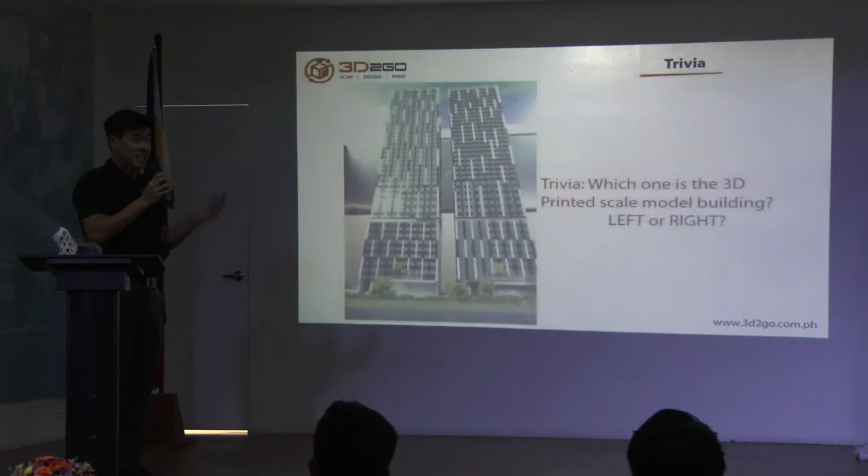Okay, so I'm gonna start off first by asking you guys, giving you guys a trivia, right? So I'd like you to pick which one do you think is 3D printed and which one was the scale model building. Is it the one on the left or the one on the right?

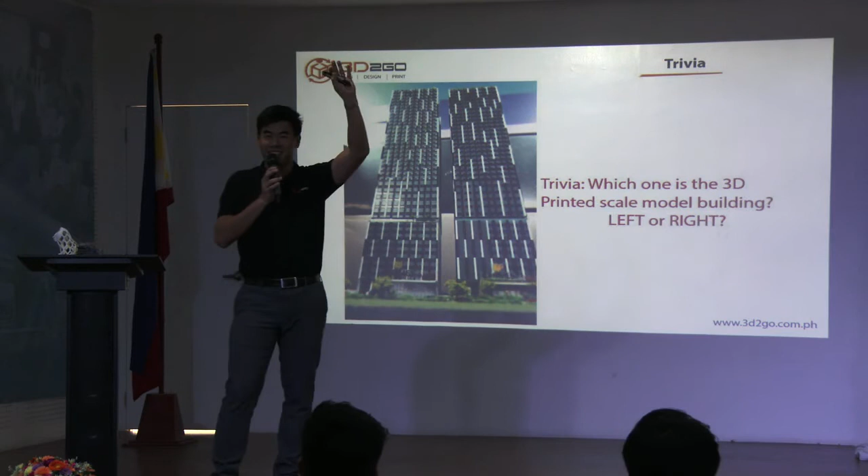Which is 3D printed? Who says the one on the left? How about right? Not many, there's a lot of unsure. So I think there's a lot more people that chose the one on the right.

So the answer is yes, the one on the right. But I guess the traditional way of doing things is usually assembly, right? You get cardboards, toothpick, acetate, and you assemble them together. But bottom line right now, the technology can be used for, and the quality of the output is actually very similar already. So you can replicate things. It's very difficult to distinguish between one from the other, right?

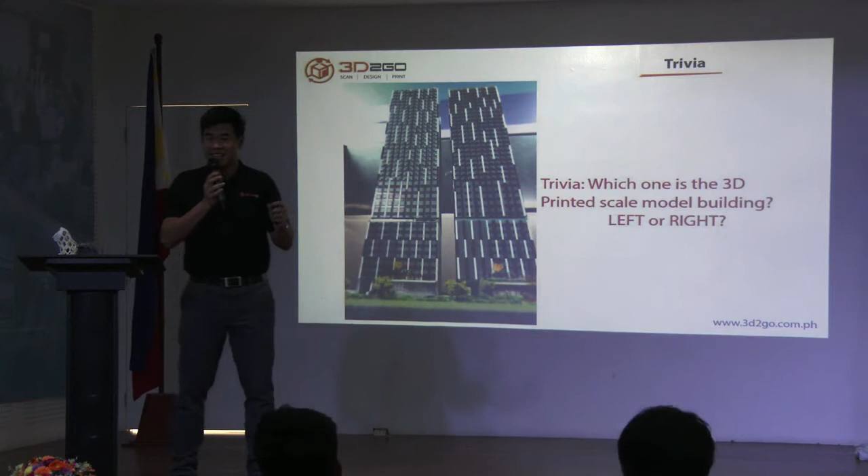The output. Now, I'd like to ask another question. Why do you think that 3D printing is not yet mainstream? Because right now, as you guys know, it's being used by government, the education sector, the tech sector, engineers. In the consumer side, it's also used by probably hobbyists, right? But it's not yet mainstream. Why do you think? It's not mainstream.

And just to give you some perspective, mainstream, when you go mainstream, that's kind of like the holy grail for any industry. Because the critical factor, when you go mainstream, it's used by your father, your mother, your neighbor, and that's where it goes mainstream because the industry will grow exponentially. We haven't achieved that point yet, right? And why is that? So, and that's the major challenge right now.

If you go back probably during the 18th century or the early 19th century, during the time that there was no industrial revolution, mass production, how do you do things? How do you get things? If you wanted a chair or a table, you go to a carpenter. If you wanted, let's say, a knife or a spoon, you go to a blacksmith or a panday, I guess, or something like that, and have it custom made, right?

But because of the advent of mass production, right now, probably, I would think, this is just a guesstimate, but probably 99.9% of everything that you buy right now is a product of mass production. And the purpose of that, the reason for that, is because they wanted to lower the cost significantly. So now, the difference here is that you have to be able to, it's a different world, right?

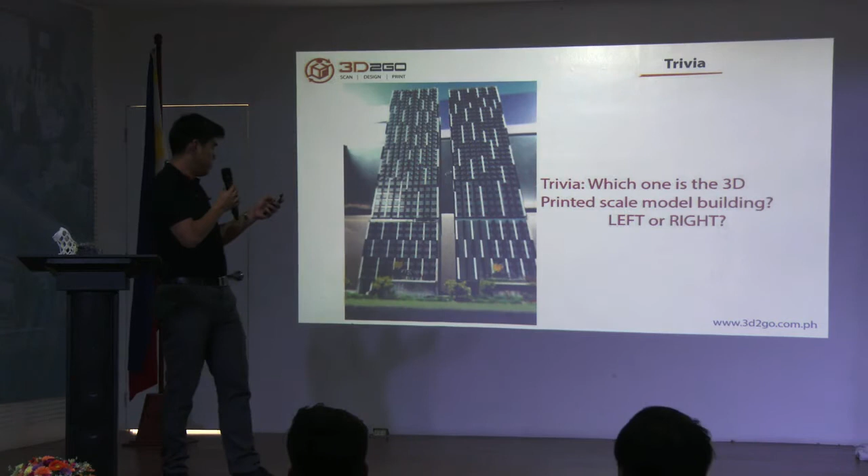So it's a paradigm shift. Like an iceberg, you think it's very small, but in fact it's actually big. So what is the paradigm right now? The paradigm is that you're limited by choices, and that's the issue we have right now in terms of making it mainstream.

Because that's the goal, if we go mainstream, the entire industry, Fab Labs included. I was asking the doctor from NCU a while ago what's the utilization for Fab Labs right now, and I would think that utilization in Fab Labs is very low.

Because I have a friend in Bicol University's Fab Lab, and the utilization is very low. A few people having certain projects done, hobby stuff and all that, but it's really not heavily used. I was asking, is it 80% utilization or 90% utilization? It's not, right? And that's the issue, because it's not yet mainstream. It's only the geeks, the hobbyists, the specialists that use 3D printing.

So now, who among you here was a fan of Game of Thrones? I was a fan up until May, the last season. For those addicted to Game of Thrones, some play cosplay and stuff like that, and you probably want to imagine yourself as the king or queen of the 7 kingdoms.

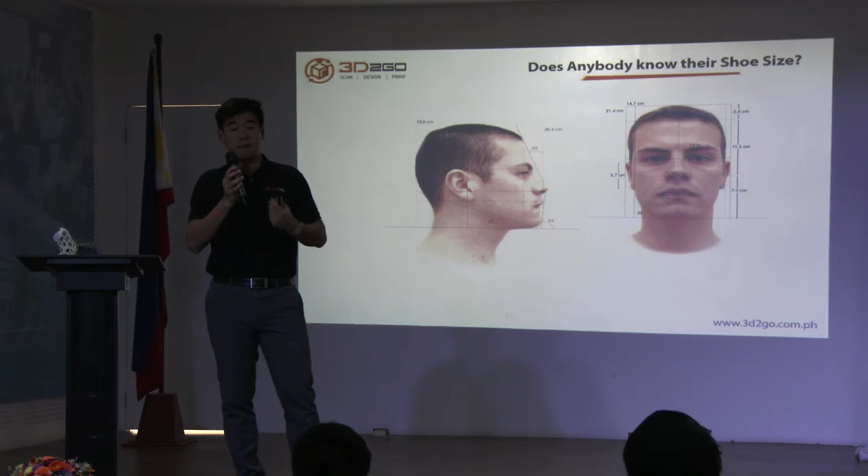Sometimes, unfortunately, some people are quite flat-nosed, and if you're flat-nosed, when you buy glasses, it has to rest on your nose bridge, placed on top of it. This is a very unique example, but it's applicable - you have to have it customized because every individual is different from each other.

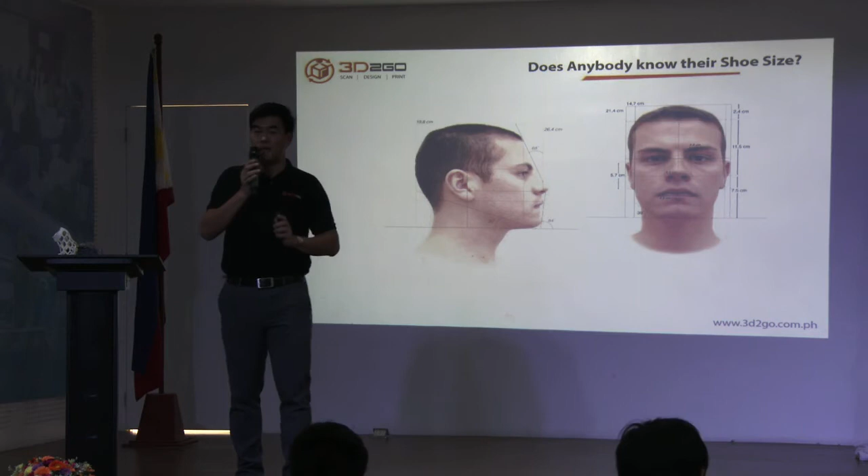More practical applications - let's say you know your shoe size, but do you know the pattern of how you walk? Because every person walks differently. Some people are bowlegged or flat-footed, some walk on their toes. Sometimes after just 1 kilometer you're already exhausted, while in other cases you can walk 10 kilometers and it's nothing to you.

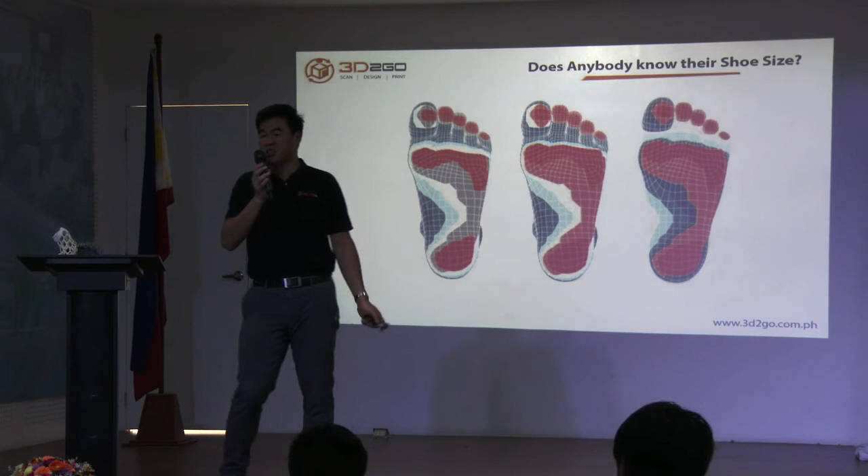So Adidas came up with a heat map of the force exerted on your feet, and partnered with a company called Carbon 3D, which was explained by Dr...

Alvin Cola yesterday as well.

This is a known company, Carbon 3D, a multi-billion-dollar company. One of the challenges of 3D printing right now, and I'll talk about Carbon 3D later, is the time of print. It takes a long time.

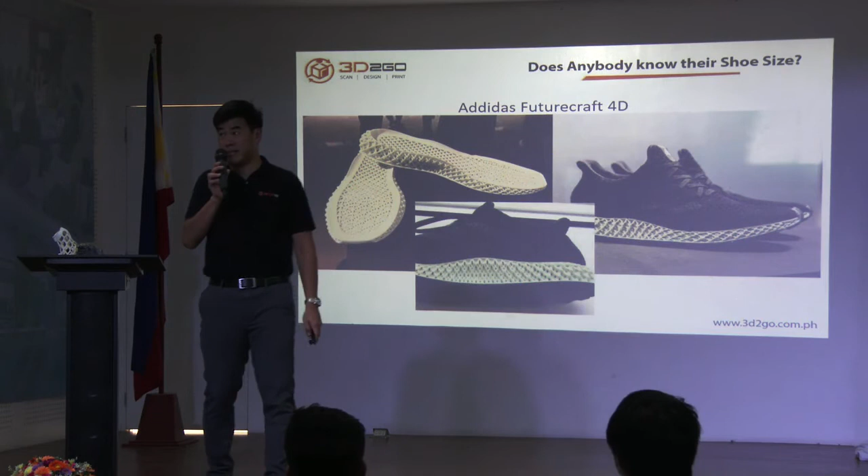Anyway, Adidas, the insole, the outer sole of the shoes, everything is customized because the objective is to balance the load of your body on your feet so you don't get tired quickly. So I'm going to talk about this one briefly.

3D scanning, prototyping, modeling, and printing. I'm not going to talk too much about printing because there are a lot of printing companies here, so they're all going to talk about their printers too. So I'm going to talk about scanning first.

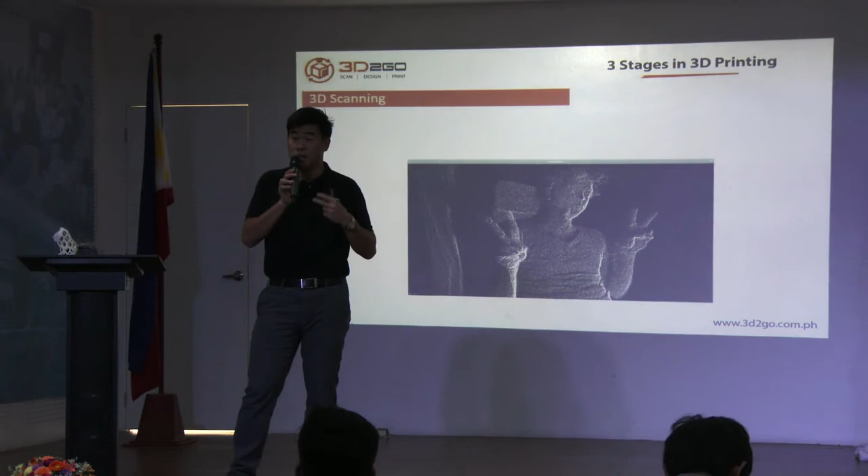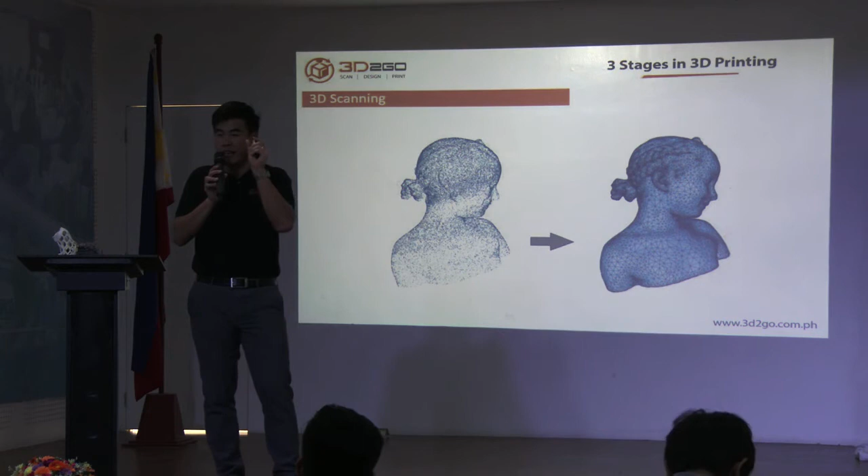What is a scanner anyway? It's the conversion from physical form to digital form through a point cloud. Basically, a point cloud is points in space that resemble an object itself. When you combine those points, you make a mesh. Then when you convert the mesh into solid objects, it becomes really a solid, the second object.

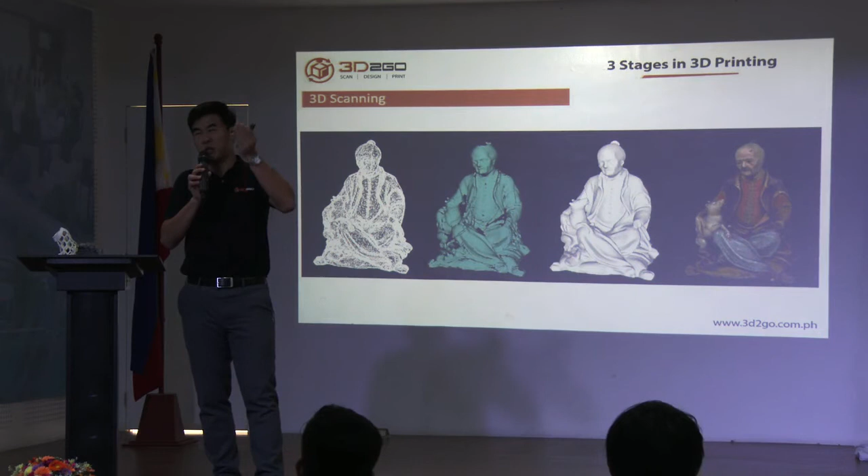So you have the mesh, which is the first image. Then when you convert it to solid images, it becomes the second one. But then you have to reverse engineer, you have to fix it, because when you scan an object, there are blind spots, dead spots, and you have to reverse engineer to fix things. Once you fix things, you arrive at the finished 3D model.

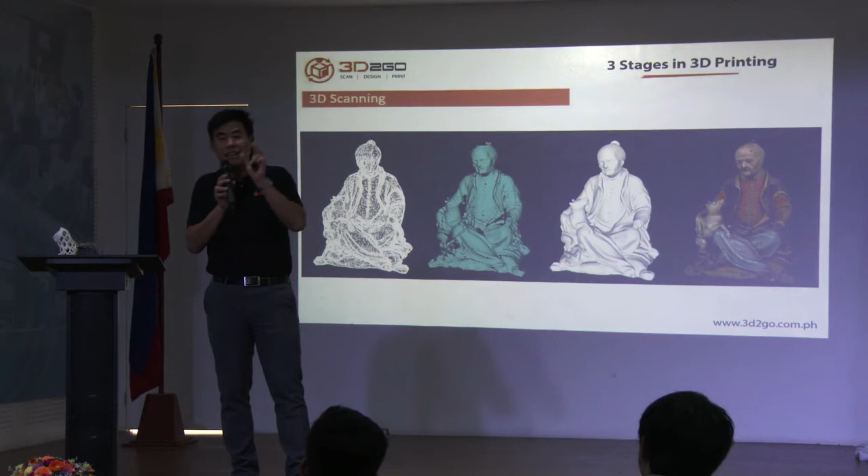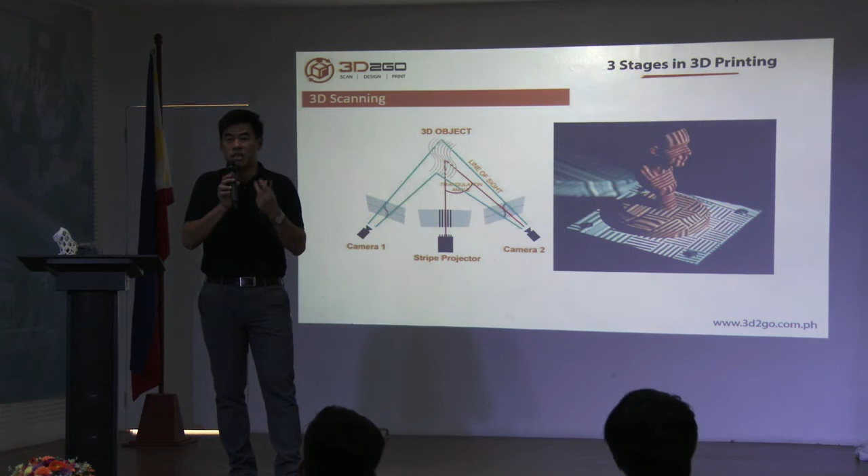And then when you add texture, that's the fourth image. So the way it works is that it projects a pattern onto an object, and any distortion in the pattern is taken as points in the point cloud. That's how it works.

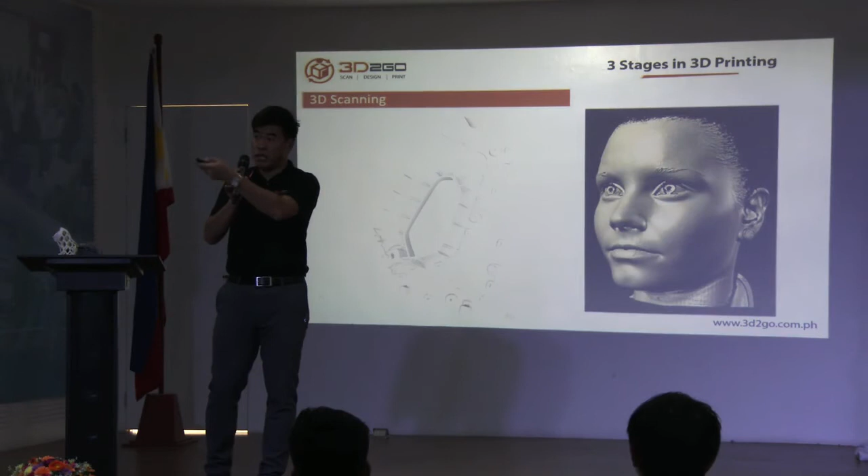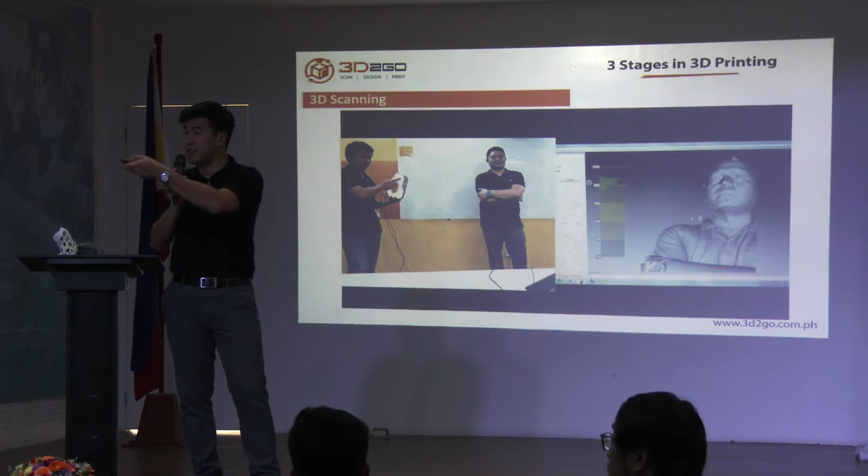So of course you can scan organic and non-organic objects. And this is an example of a video that we've done. I'm just going to play this video shortly.

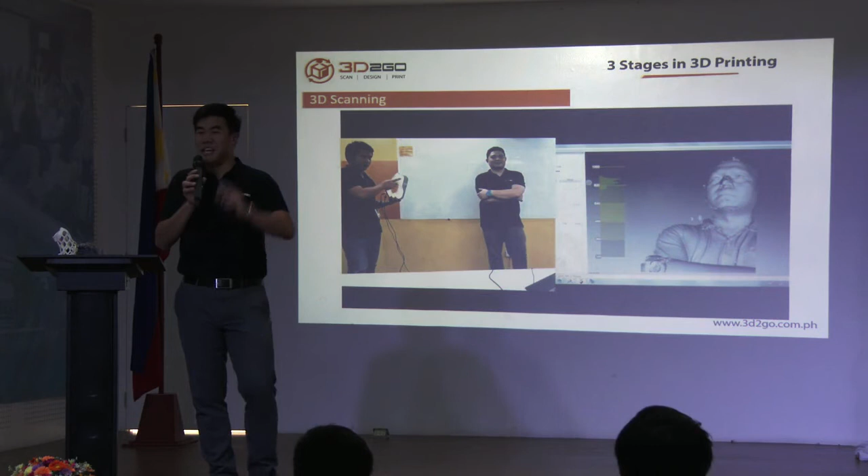Anyway, this is a picture of a person being scanned, so I'm just going to skip through this.

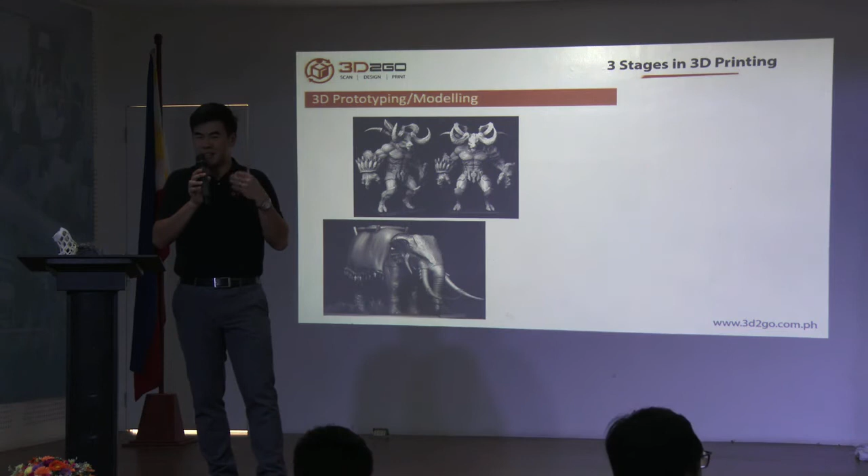So basically, when we do 3D modeling—so I talked about scanning—the next one is modeling and prototyping. Normally when we talk about modeling, we subdivide it, not as a standard, but based on organic and non-organic modeling. Organic is monsters, creatures, animals, plants, and stuff like that. Non-organic is based on geometric shapes, circles, spheres, triangles, and all that.

I have to speed up. Normally you have several different softwares that you use. For organic modeling, it's usually animation software like Maya, Max, ZBrush, and of course in the engineering world, you're familiar with SolidWorks and AutoCAD. I'm not going to focus on this because you guys already know all of these things. Thingiverse, PinShape, and of course simpler software tools as well.

Subtractive manufacturing and additive manufacturing. Of course, you guys are familiar with subtractive and additive—subtractive uses CNC machines, and additive is different.

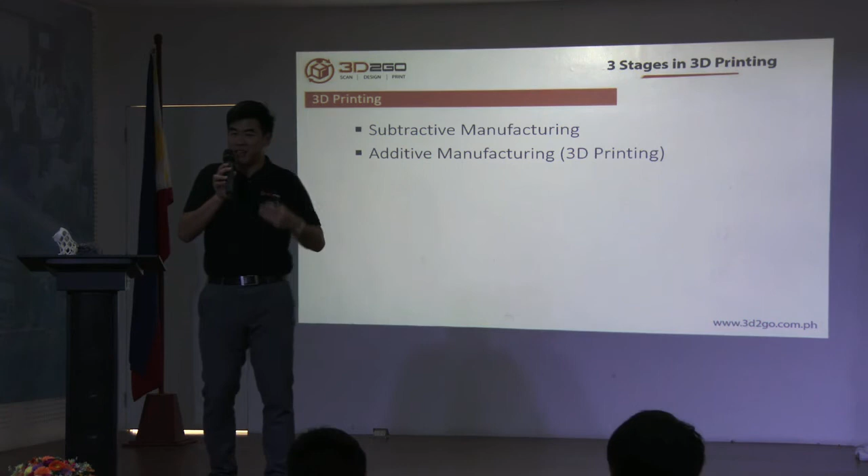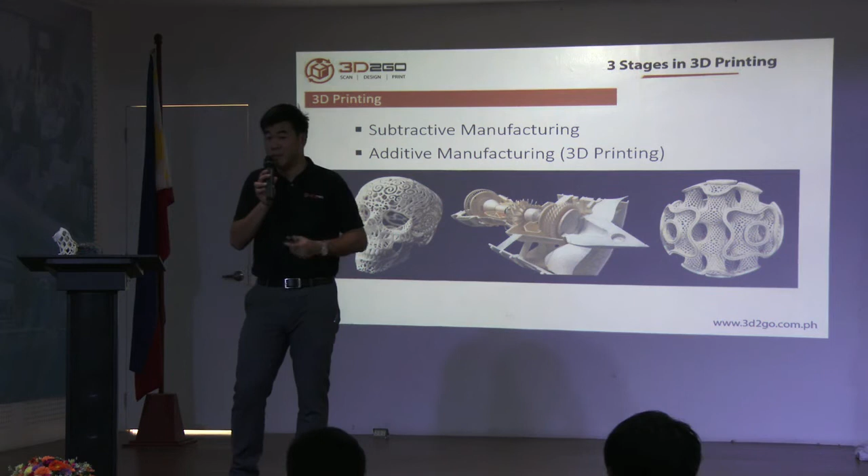Now, one of the things I wanted to focus on is the differences. Why is subtractive manufacturing not ideal? Because it's limited by complexity—you cannot print very complex objects with subtractive manufacturing. Although you know the concepts of subtractive manufacturing, the main advantage of additive manufacturing is the printing complexity. Because if not, you could just go to a machine shop and have something done.

So this is one thing. This is a typical bracket—the one you see on your right is a typical bracket. Using topology optimization, you can actually change the orientation of the object to make it lighter.

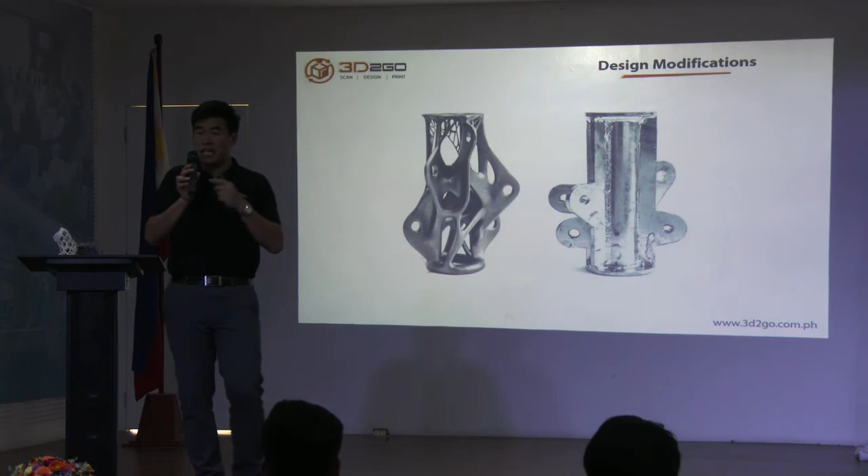Traditionally, if you want to make something lighter, you buy a lighter material like titanium or aluminum, but that costs a lot more. So how do you maintain cost while making something lighter without compromising structural integrity? That's through topology optimization.

Here's one example. You cannot print something like this using subtractive manufacturing processes, it has to be additive. Another example: the one on the left is 73% lighter, same material, same function, but 73% lighter. That's one of the advantages.

I hope I can play this. This is Carbon 3D. I was talking about Carbon 3D, the technology of Carbon 3D is called CLIP, right?

The video is 7 minutes, sped up 7 times, so it's a 1-minute video. You cannot print these objects this fast using other printing technologies.

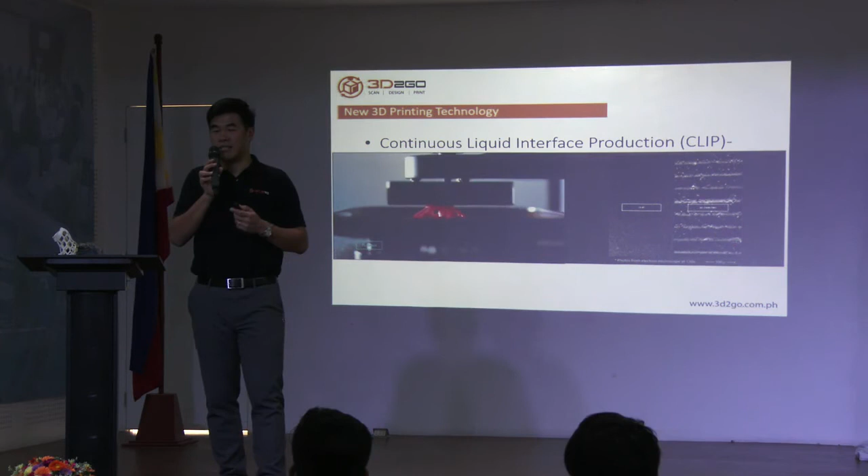The way it works is instead of printing on a layer-by-layer basis, it prints things by growing it. A typical stereolithographic or SLA printer uses light, laser, or DLP to fuse photopolymer resins.

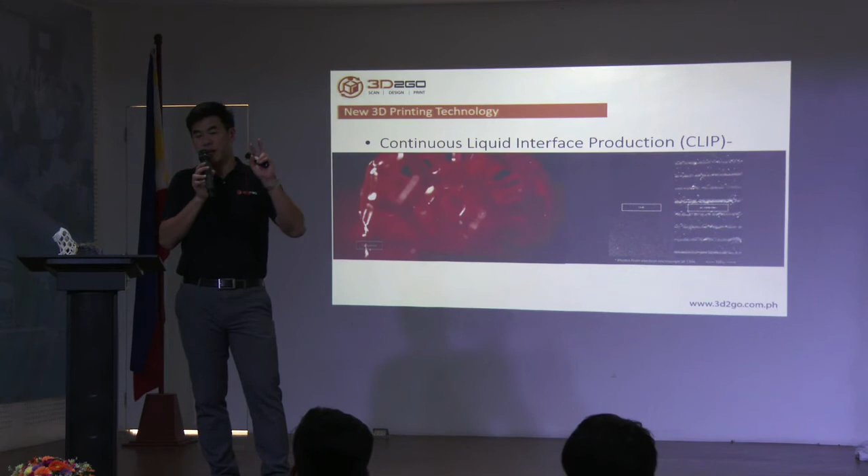In this case, you use two different variables: you use light or lasers to cure, and then you use oxygen to inhibit the curing process. When you use both things simultaneously, you can make it grow, kind of like the process is growing.

It's a lot quicker, imagine about 7 minutes. In a typical printer it would probably take at the very least 50 minutes, an hour, maybe 2 hours. This is a 1.5 by 1.5 by 1.5 inch sphere.

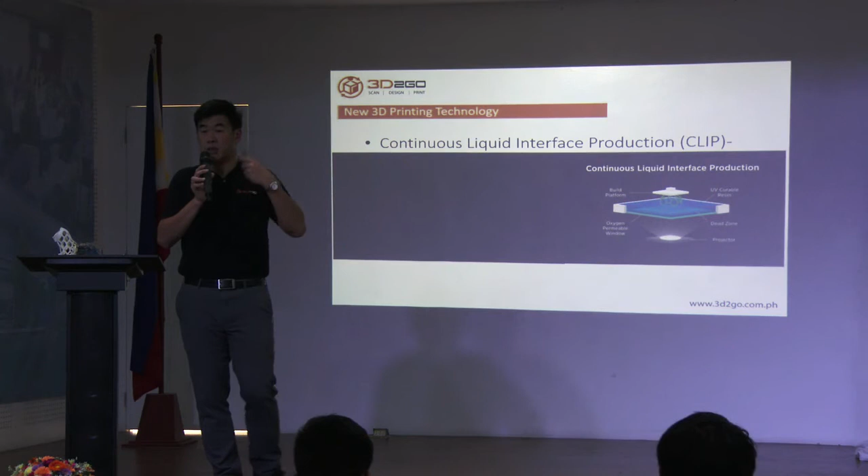The difference is huge compared to 7 minutes, and that would change how manufacturing is done, enabling customized manufacturing processes. It doesn't have to be mass production all the time.

Another advantage of this growing process: when you print normally, you have to understand that printing on the x-axis, z-axis, and y-axis produces different material properties. You have to be familiar with that. But when you grow it, you don't care about orientation, whether it's lying down or something, it's the same thing.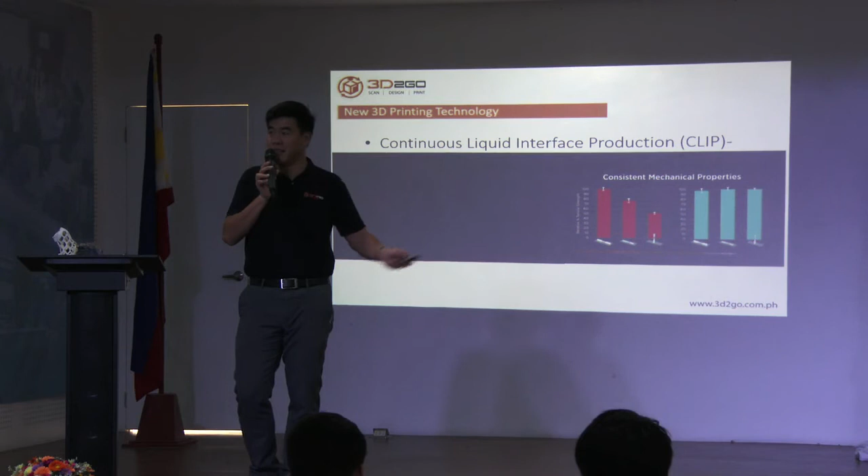Another new technology is volumetric printing. Although carbon is already well established, volumetric printing is not. For DLP printers that use a projector, printing layer by layer always uses still frames.

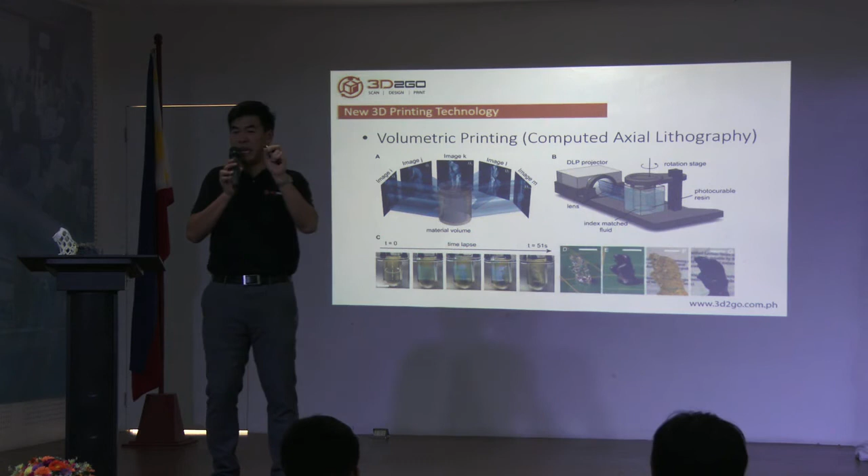This one is video, you're projecting something in video format, and you have a resin tank spinning. So when you're printing, you're growing the entire thing simultaneously. This is going to be a very quick, fast technology as well.

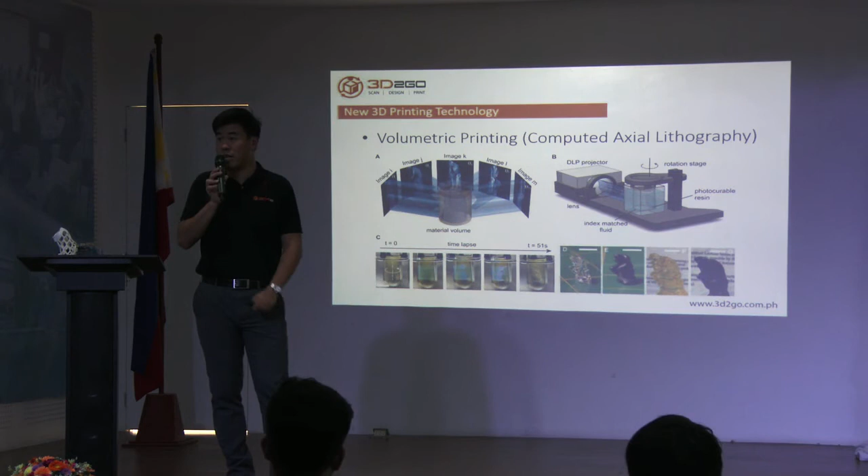What does the future hold? Chocolates, of course, you're kind of familiar with these things. I'm going to speed through this process.

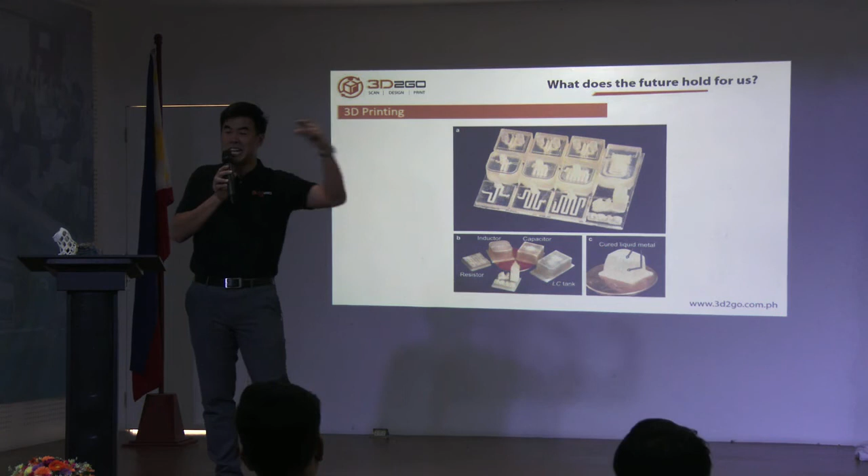Sugar, semiconductors, this was also discussed by Dr. Advincula, which is currently happening right now. In the future, you'll be able to print both conductive and non-conductive materials in one go, and that's a huge advantage. Right now you print a PCB, then you have to put it in a casing. In the future, you print the PCB with the circuitry inclusive of the casing in one go.

It's a huge advantage, both for processing and it's a lot more sturdy since it's one piece. This is organ printing as well. Right now we're still not there, but they were able to print the mesh of an organ, it's still under development. I'm thinking probably another 5 years or so, I don't know, doctor, if it's going to last another 5 or 10 years to be able to print organs.

There's a company called Organovo, which is kind of like one of the forefront companies that does that in the US. Of course, building, you know, this is already...

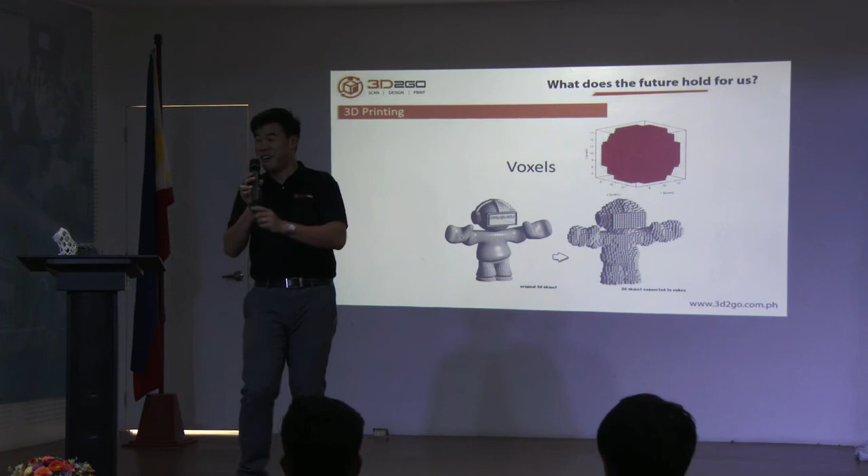I'll just play a video that we've done, which is something we're proud of in the prosthetic industry. Sorry, a few minutes. Can you play?

So we're doing prosthetics right now. This is just marketing stuff.

But if you fast forward further, I'll show some of the projects that we've done.

These are examples of projects that we've done right now. We scan the person's leg or arm, and then we reverse engineer and design a prosthetic arm, leg, finger, or whatever part. Some of them are even functional—we print functional prosthetic limbs for people. So this is a bit of a CSR for us, corporate social responsibility.

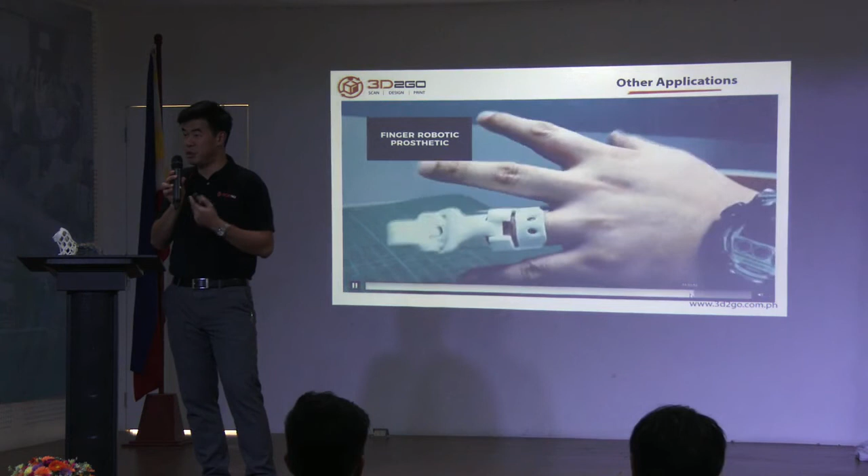Fast forward. Then we do fingers and all that. So next, another function is on the orthopedic side.

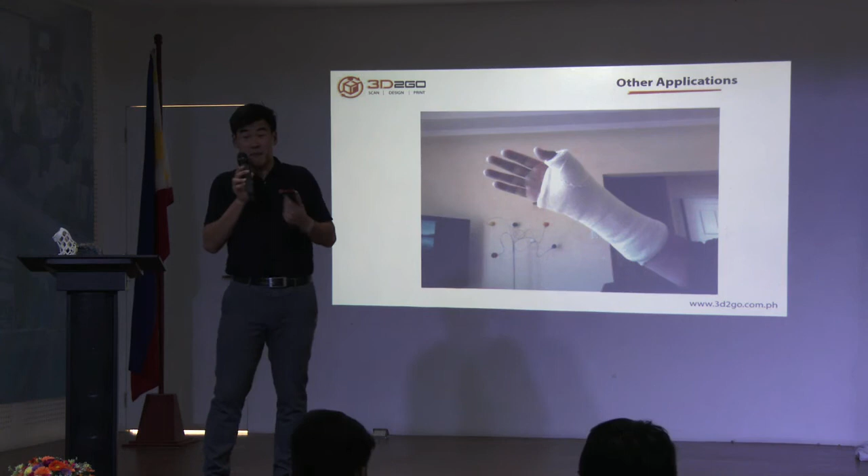Orthopedic is typically cast mold. So if you break a bone, your arm, wrist, or elbow, you have it casted. But what can you do with it? Sometimes you wear it for a couple of months, it's itchy, it's uncomfortable, you can't get it wet, you can't take a bath with it. Maybe you can draw on it—that's the only thing you can do. You have to wear it for a long period of time.

But instead of doing that, you can do a cast mold—an exoskeleton cast mold. I used to have tendonitis from playing too many cell phone games, unfortunately, so I had a problem with my finger and the doctor advised me to keep my wrist still. So I actually printed an exoskeleton for myself. I scanned my wrist, came up with an exoskeleton, made sure the supports were correct, and it's functional. It's a lot cooler, it's reusable—if it happens again in the future I can do it, and I can get it wet, no problem. So there's a lot of functional applications to that.

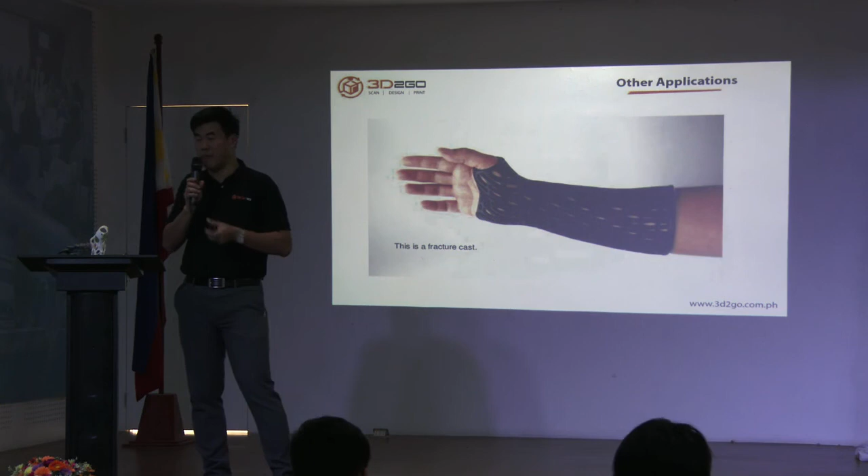So now, functions—prosthetic legs. We've done prosthetic legs, fingers as well.

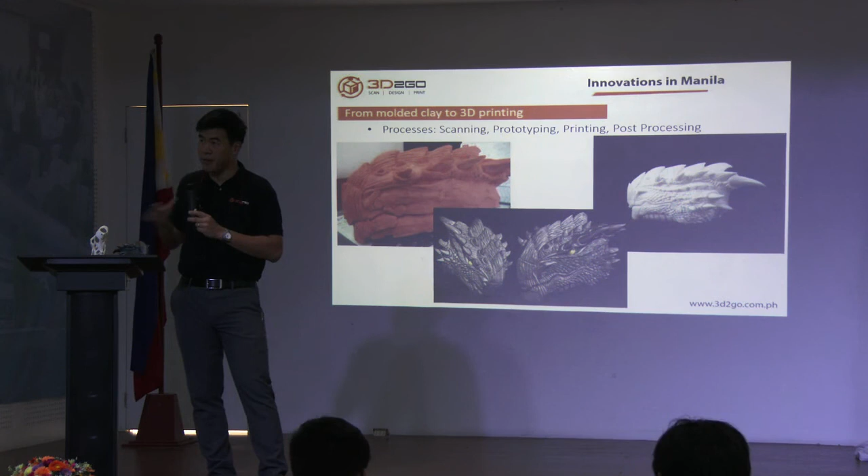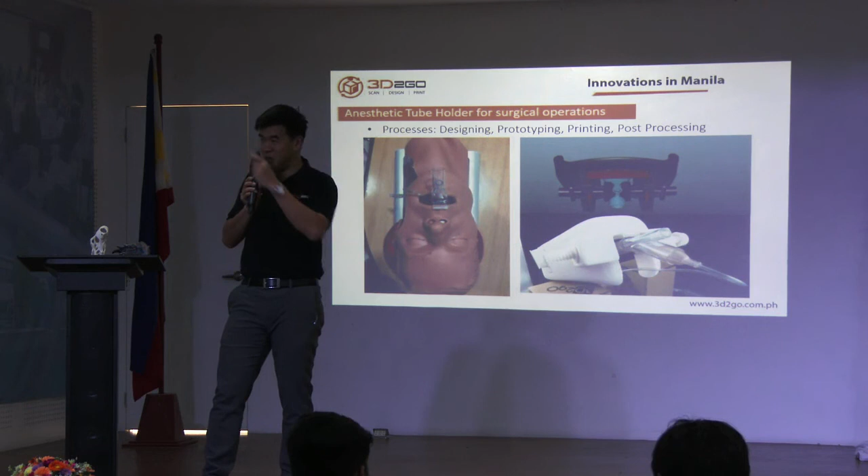We've also done this—an example of a molded clay that was given to us by a customer. They gave us inputs, we finished the model, and came up with the finished product for them. Also, an anesthetic tube holder—the current model for that was disposable, as mentioned to me by the doctor. They wanted something reusable, so we came up with that holder.

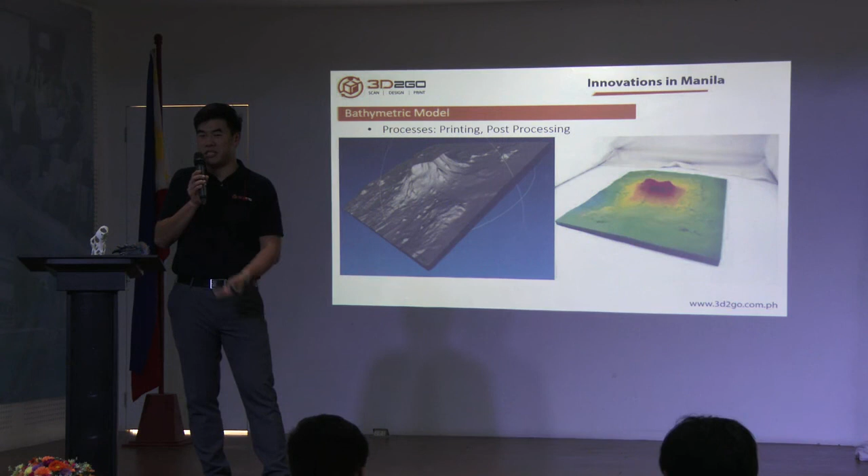And this one's a bathymetric model—it's the opposite of a topographical model, but under the seafloor. So we came up with some topographical maps for this.

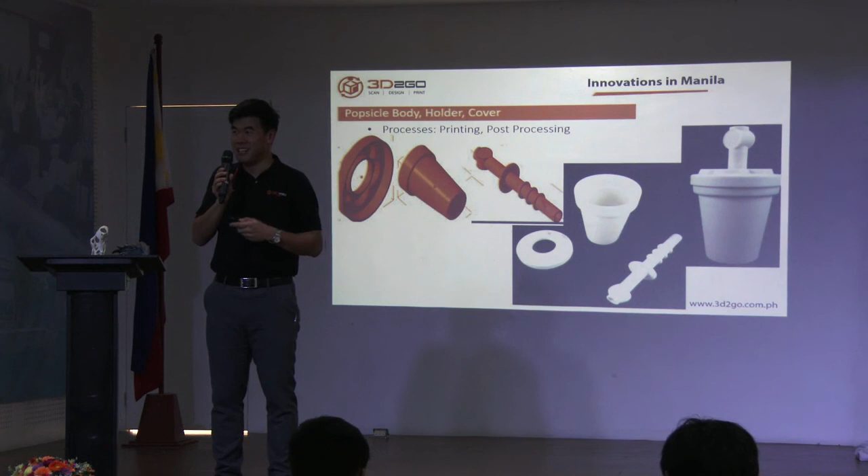Even aeronautical components. The client wanted to enhance the part because it kept breaking, so we had to redesign and enhance certain components so it doesn't become too flexible and doesn't break.

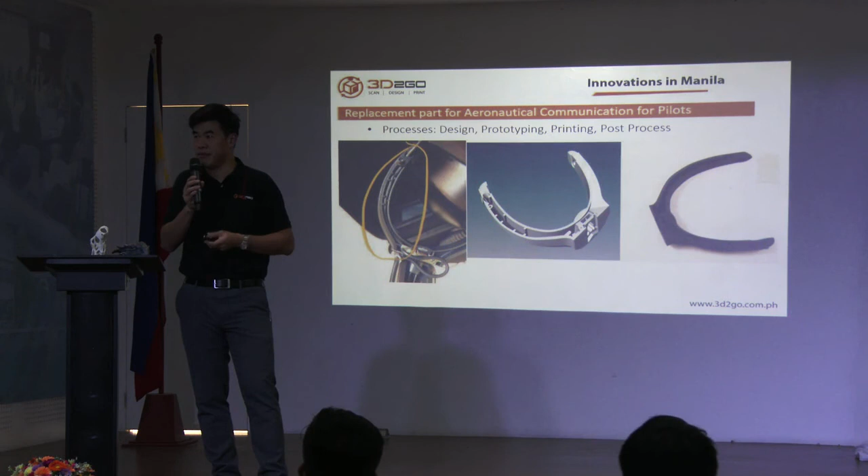This is for an ophthalmologist doctor. She didn't even give us a design—she gave us pictures of things she saw online, and we reverse engineered it and came up with something for her: a retinal imaging adapter. This is our custom design.

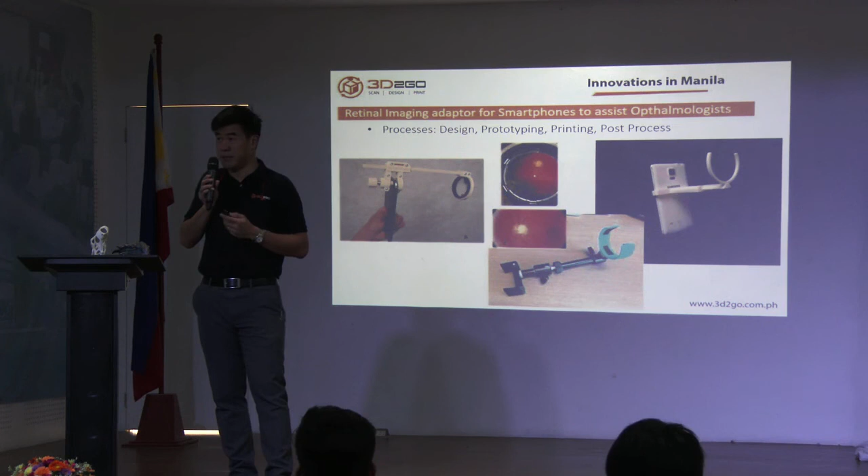So as I mentioned earlier about inclusive innovation, we have to get it to the mainstream market. We have to see the function for different people, whether personal, business, or practical application—that's what we need to go to. And I think it's awareness. Everybody knows this, but we have to bring awareness. We're kind of at the forefront of bringing awareness of 3D printing to the masses, because that's where it becomes really, really great. Thank you, guys.